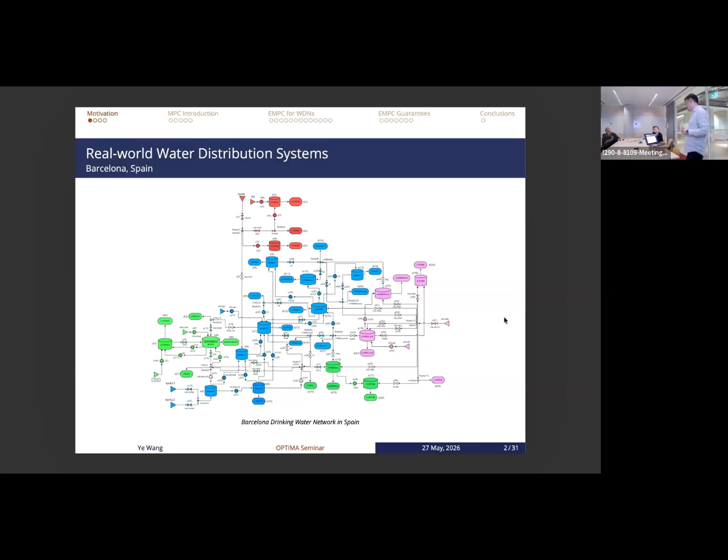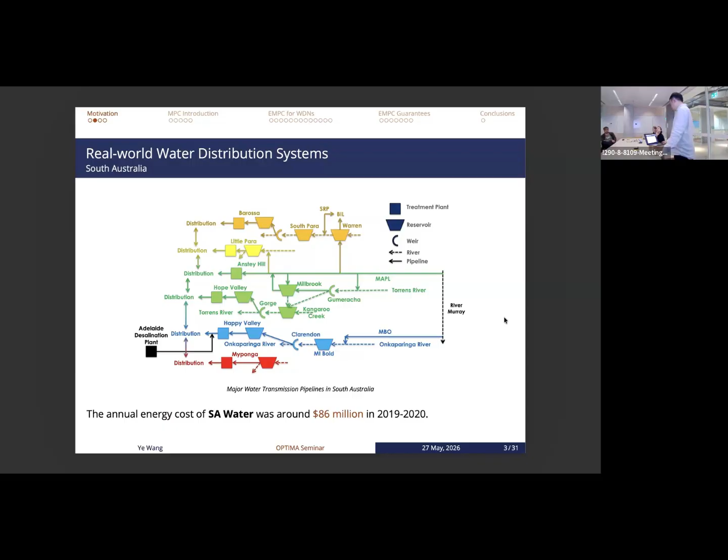For this kind of distribution system, I also want to show you the current operation in South Australia. A few years ago we had a chance to visit the headquarters of SA Water. There's a room called the operation room in the headquarters, with quite big screens and a lot of computers. From that room, they can remotely operate all the pump stations across the region.

And there are several teams actually working in shifts, just manually choosing operations, turning the pumps on and off remotely. And of course, since they consume a lot of energy, a lot of electricity, they can access the national electricity market. So they directly buy electricity from the market using the spot market price. So they also have some access to this price prediction.

So actually, when they choose operations, of course, there's some guideline. For example, they have some price threshold, predefined maybe by the other team, suggesting the operation team choose pumping when the price is below a certain level. And also, they want to make sure from this room they can operate the pump station and also monitor the water storage in some reservoir, in order to meet the water demands.

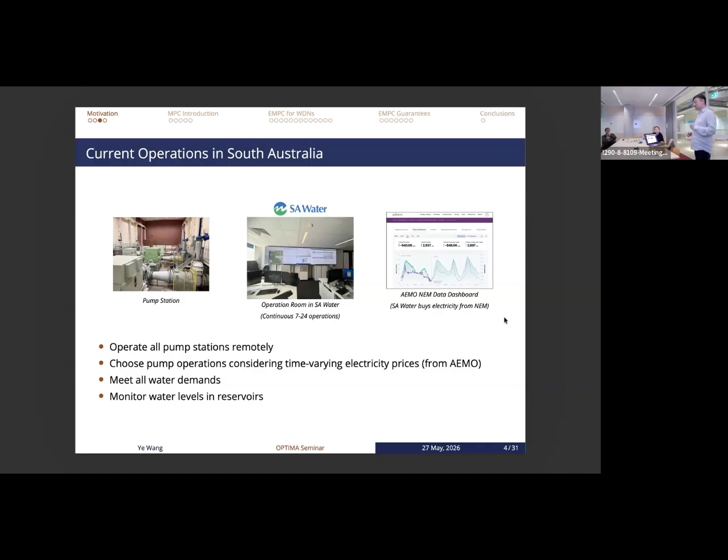Well, for us in academia, in the university, we also want to do research. We want to design optimization-based control for this type of system. So we need to consider the system: it has pressure pipes, pumps, and valves, and most importantly, there's storage in the system. And by considering these time-varying prices and time-varying demands, if we have some storage, by intuition we know that we can shift some operation from expensive to cheap periods.

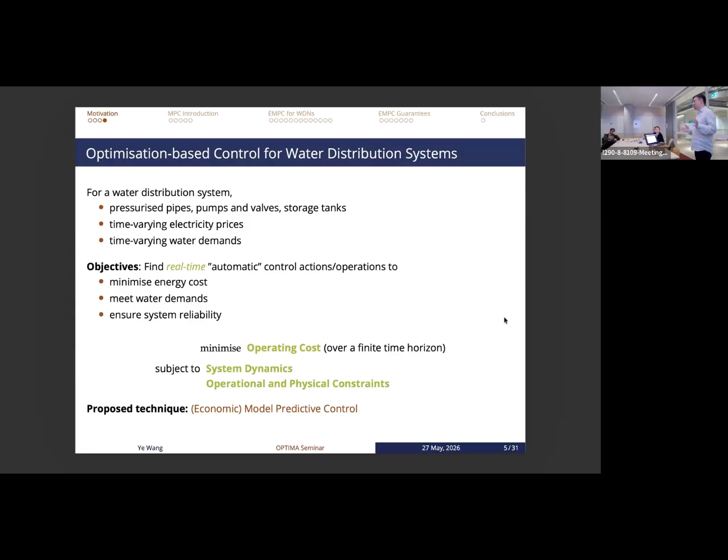And the goal is that we want to find some kind of real-time automatic control actions or operations to minimize the total energy cost, and at the same time, we need to meet all the water demands. And also when we deploy a control algorithm, we want to ensure the system is safe and reliable, so it can be used in the long term. So to achieve that, we can basically write an optimization problem. And we propose to use MPC, or economic model predictive control, which is quite an advanced control technique that can help us formulate a problem in order to make a good decision.

Well, before I enter the technical details on how to design this economic MPC, for a general audience, I just want to briefly introduce what MPC is. In terms of terminology, it's called model predictive control. Here, the model actually refers to the system model or system dynamic model. So rather than an optimization problem being called a model, here we call the model a dynamic model. So in MPC, we want to use a dynamic model of a system or plant to predict some future evolution of the system in order to choose a good control action or control operation.

And basically in MPC, we just want to build an optimizer or optimization problem. We'll design some objective function and also some constraints. And of course, the system model is included in the constraints. And sometimes we do have a reference, that is, we want to drive the system along some given trajectory, either a fixed point or time-varying references. And sometimes when we compute the objective function, we may consider some information. Since it's along the prediction horizon, we need to use some forecast information.

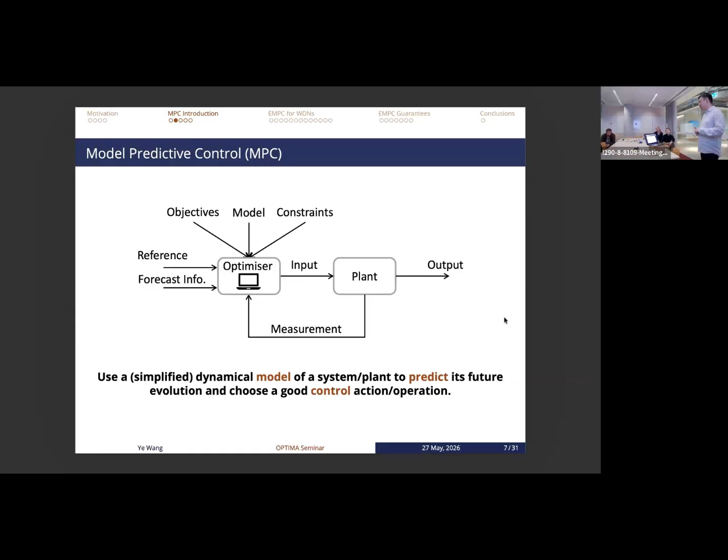So for MPC, the main task is to formulate an optimization problem. So here's one. We have a reference, which I just denote by R_t. It could be varying or it could be a constant. And there may be a corresponding reference for the input. We want to minimize the difference between the system output and the reference point. And we have a prediction model, a system dynamics model, where X is the state and U is the input. From the prediction model, we can also output some signal, denoted by Y.

And for the system input and system output, sometimes there may be some physical or operational constraints to be satisfied. And the last constraint is called state feedback. That is, at each time step we take the measurement of the real system and set it as the first predicted state in order to initialize this optimization problem. So as shown in this figure, the goal is that for a given reference R_t, we want to drive the system output to track this reference R_t.

And we'll make it by solving this optimization problem over a horizon. I just denote it by N, so it's an N-step optimization problem. We'll choose the corresponding N control inputs, from U0 to UN-1. And as you know, by solving this optimization problem, we optimize with respect to a sequence of control actions, from U0 to UN-1.

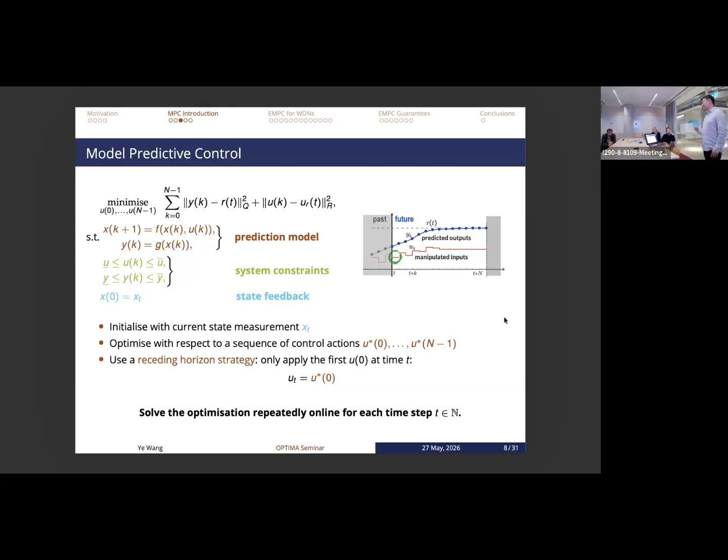And for the MPC, we always just implement the first one. So we consider a receding horizon strategy: only implement the first one and discard the rest. And we resolve this problem again at a different time step. So we just solve this optimization problem repeatedly online. At each time step we just use the first one and discard the rest.

And economic model predictive control is a concept that came after MPC appeared. It's also driven by the application. Economic model predictive control is like a more general form, or generalized MPC. In this case, there's no reference given. So instead of minimizing the difference between output and the reference, we want to directly minimize some stage cost function. It could be any general function.

For example, in the water system, we want to directly minimize the economic cost. And of course, sometimes we have this price signal, and we also need to use a price forecast along the horizon.

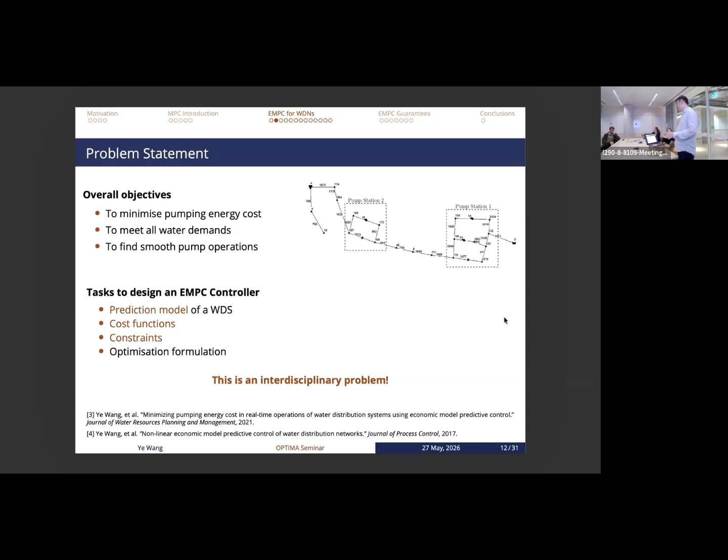Well, for the predictive model, we need to model each important element in the system. The first one is the tank, the storage.

So for each tank in the system, we can apply mass balance or volume balance to the tank, and we can find a differential equation. So here is a discrete version of the differential equation.

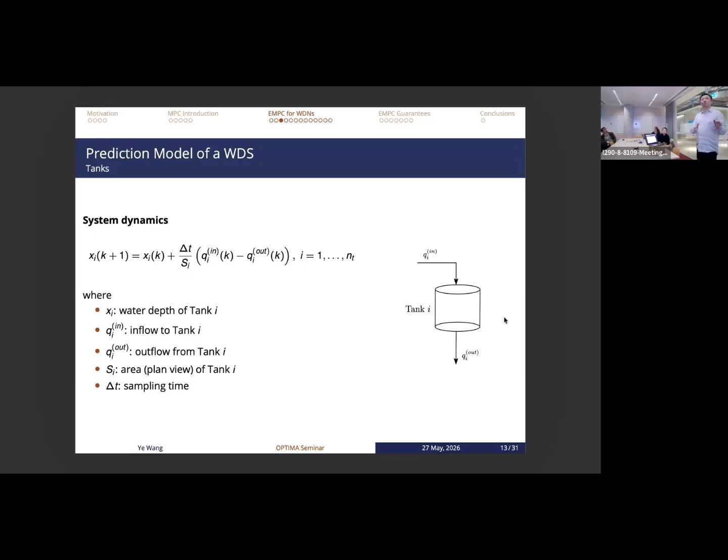X of I is the water depth of tank I, and K is the time. So the water depth of tank I at the next step is equal to the previous time step, plus the accumulated water to this tank and minus the water used after the tank. Q in is the inflow to the tank, Q out is the outflow from the tank, and then we just use the sampling time and also the area of the tank to transform this water flow to the volume or to the depth.

The second element is the pumps. So in a water system, they may have several pump stations, either set in series or at different branches. And also in each pump station, they may have several pumps set in parallel. So here, we just want to find a control-oriented model, or simplified model, for the control purpose.

So here we want to model the outflow from this pump station, and we use an integer variable to denote how many pumps are turned on in this pump station. It's denoted by this n, and through a function phi we want to build this relationship between this integer variable and the outflow through this pump station.

And another constraint we need to consider is for the nodes. So there are several junction nodes in the system without storage capacity. But for these nodes, we need to make sure the same volume balance or mass balance is satisfied. So for example, this node has two inflows and maybe two water demands. So the total inflow should be equal to the total outflow. And we can put a vector function to gather all the nodes, including all the nodes without storage capacity.

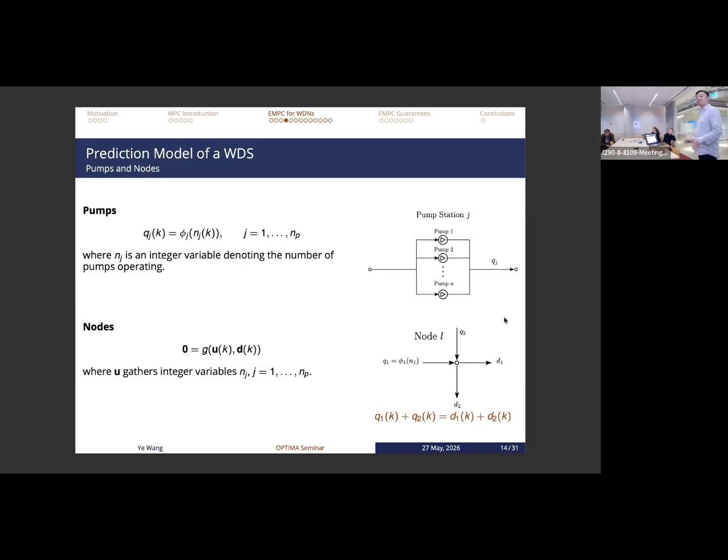And the next task is to define the cost function. From the objectives we are considering, the most important one would be the pump energy cost function. Since we choose the decision variable to be that integer variable n, we also want to fit another function to estimate the energy consumption by these n pumps which are turned on. And we could have time-varying electricity prices, forecasted along the EMPC horizon. If we do the summation over all pump stations, we have the total pump energy cost.

Another part is that we want smooth pump operation, which means we don't want to turn the pumps on and off too often. So we can define this smoothness cost function to penalize the change of the input. Here the input is those n, the integer variables. And R is just a weighting matrix, which we can tune in order to get this smooth cost function.

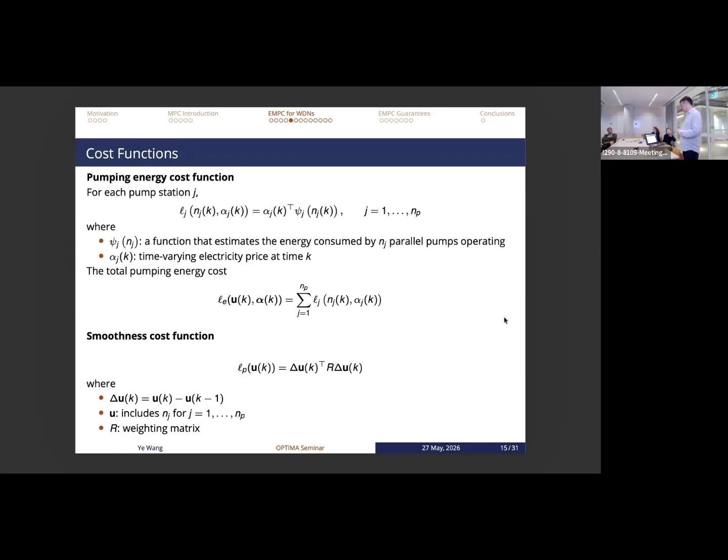So in the end, we can build this economic MPC optimization problem. We want to minimize the total cost over N steps. This optimization problem is subject to several constraints. The first two are from the prediction model. For the tank, there's a physical capacity, so there's an upper bound for each x. And from the operational point of view, we can also set a minimal water depth for each tank to get a lower bound for x.

And for the U, the lower bound is 0. The upper bound depends on how many parallel pumps we have in each pump station. Additionally, as highlighted in red, from EMPC we can also introduce a terminal cost and terminal constraint, which could be very useful when we discuss theoretical guarantees. I will discuss them later on.

Here we consider the price forecast and the demand forecast available along the EMPC prediction horizon. At each time t, we solve this optimization problem and only implement the first input, discarding the rest, and then in the next time step we resolve it with a new update of x t, from the new measurement of the system.

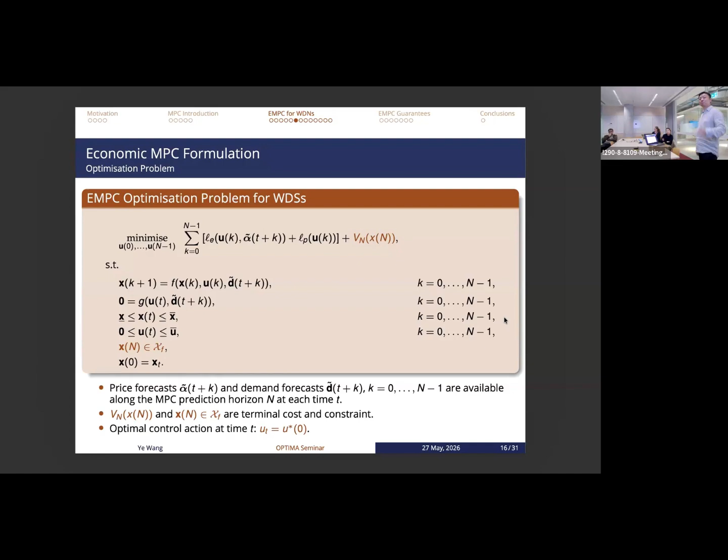Well, in order to test this economic EMPC, we just chose an open source benchmark. The original one is from the UK. It's called the Richmond Water Distribution Network. Here we also tuned it a little bit. We just want to start from something simple in order to verify and get some insight into these new algorithms.

So for this one, we only have one water source on the right-hand side, and there's a tank on the left-hand side, tank A. And there's one demand after tank A, at node 10. In this branch there are actually 2 pump stations. Pump station 1 has 2 parallel pumps. Pump station 2 has just 1 pump.

And using that system dynamic model, we can build this. We find this single dynamical function for tank A. And for the pumping flow, we want to find a model with respect to the integer variables. So here we have two integer variables. N1 is for pump station 1, so it could be 0, 1, or 2. N2 is just 0 or 1, for pump station 2.

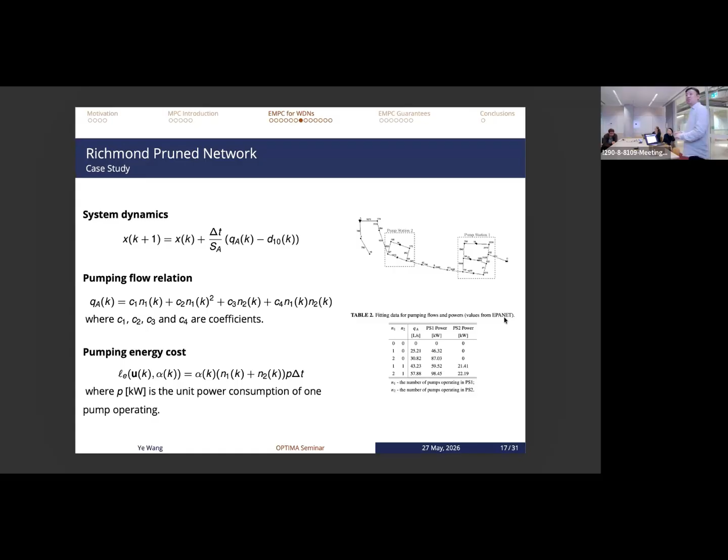And we can get the flow data corresponding to the N1 and N2 values, and also the corresponding power consumption for these two pump stations. With those data, we can fit the pumping flow relation and also find the pumping energy cost, which here is a linear function.

In terms of the constraints, for tank A, the physical limitation is a maximum height of 3.37. For the lower one, from the guidance for normal operation of the water system, we expect to have about 40% full storage in this tank. So we can set a lower bound of 1.4 meters for tank A.

And for the pumps, which are the input signal, U has two variables, N1 and N2. In pump station 1, we have two pumps. In pump station 2, we just have one pump. So that's from 0 to 2 or from 0 to 1.

Also, when we sampled the data from the simulator, we realized that when the first pump station opens two pumps but the second pump station doesn't open any pump, we cannot deliver very significant pumping flow, but the energy consumption will be quite high. So we want to exclude this scenario. Then we just put an additional constraint: N1 has to be greater than N2, N1 minus N2 less than 1, in order to eliminate the N1 equal to 2 and N2 equal to 0 case.

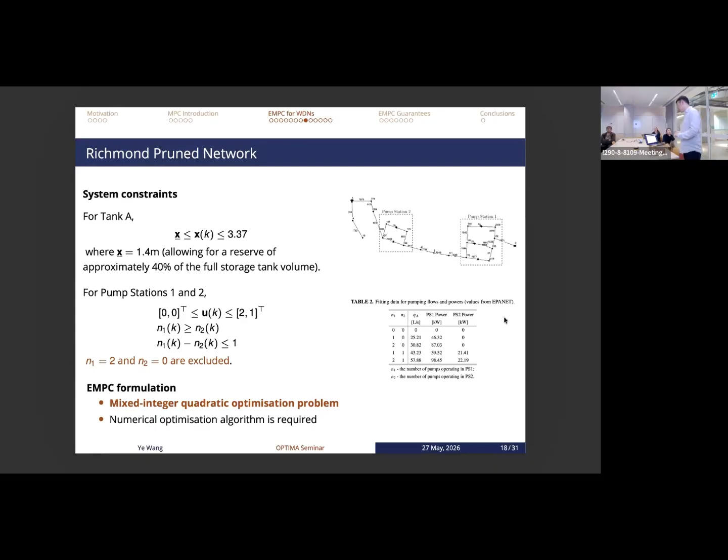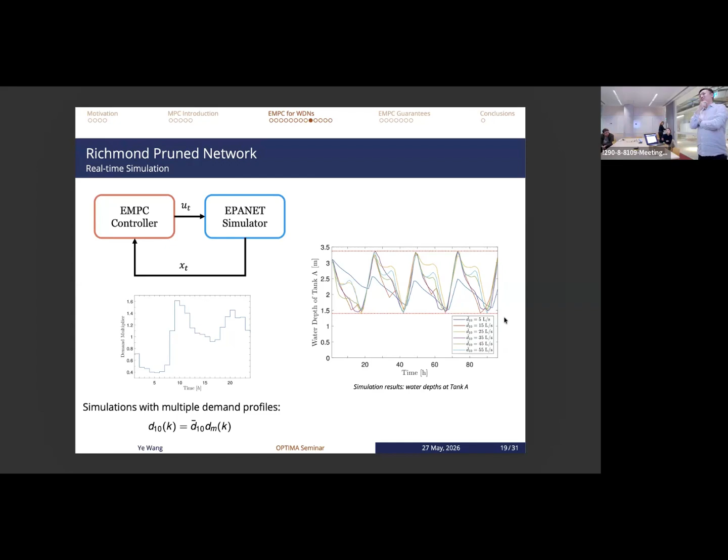So with different demand profiles, we can find on the right-hand side the tank evolution over, let's say, a 4-day simulation. It starts from the same water depth in the tank and then varies differently. That's because the demand will be different.

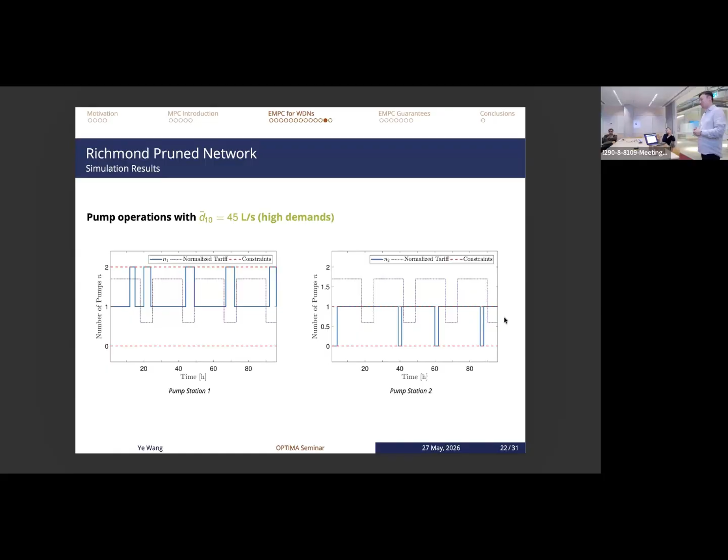We also do a comparison in order to verify the effectiveness of this EMPC. We compare with a simple controller called a trigger level controller. It's based on the amount of water stored in tank A to turn on the pumps. If we have a lot of water in tank A, we can turn off the pump. If the water level in tank A is below a certain amount, we can choose to open 1 pump, 2 pumps, or 3 pumps.

We do the comparison across different base demands from 5 to 55. For this network there's a capacity: for base demand greater than 55, it cannot be satisfied. So that is the capacity of the network. From the comparison here, we show the different costs.

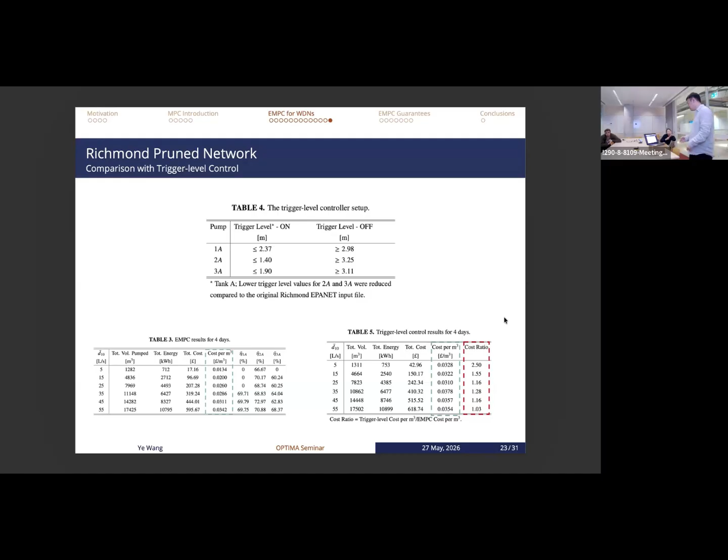Next, I just want to give you a brief discussion on the guarantees of economic MPC. The first property economic MPC can provide us is called recursive feasibility. With economic MPC, as you can see, we solve an optimization problem online at each time step. So we need to make sure that at least the problem is feasible. That's what we call recursive feasibility. If we start an economic MPC controller from the beginning, we want to make sure that at any time step in the future it will be feasible.

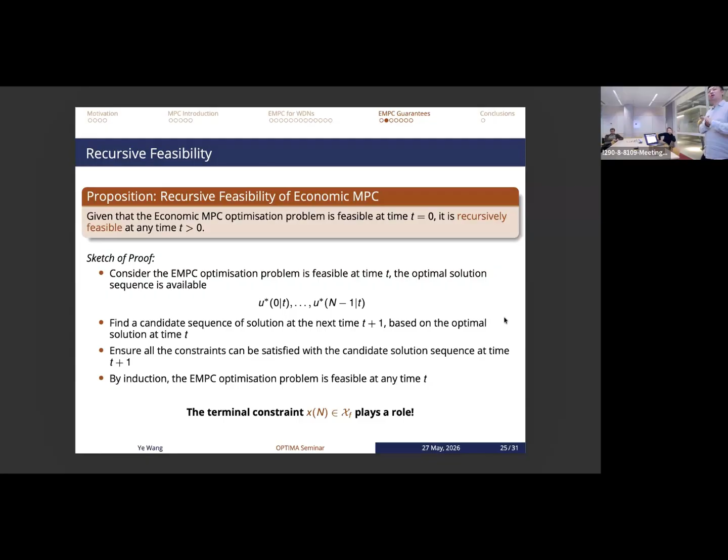And we do have a mathematical proof on this one. For the time being, I won't go into too much detail, but briefly, the terminal constraint actually plays a big role here when we do this mathematical proof for the recursive feasibility.

And for recursive feasibility, we also have the robust case, that is, when the model is not perfect. Here I use W to denote disturbance or uncertainty to the system. This uncertainty could affect the system dynamics. For example, in the water system, the uncertainty could come from the water demand. We may not have a perfect water demand forecast, and if the demand is not perfect, then the estimation of the water volumes or water depths in the tank would not be accurate.

The uncertainty may still be unknown, but one option to handle this uncertainty is to consider that it can be bounded by some known set, here big W. Now we can further improve our MPC using an approach called the constraint tightening approach. That is, we tighten our constraints on the state and on the input a little bit in order to make the controller robust. With that, we also have the recursive feasibility guarantee for the robust version of this economic MPC.

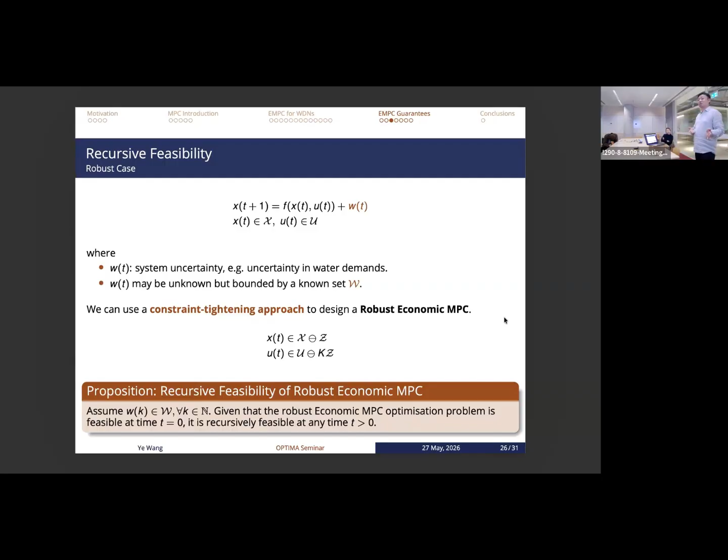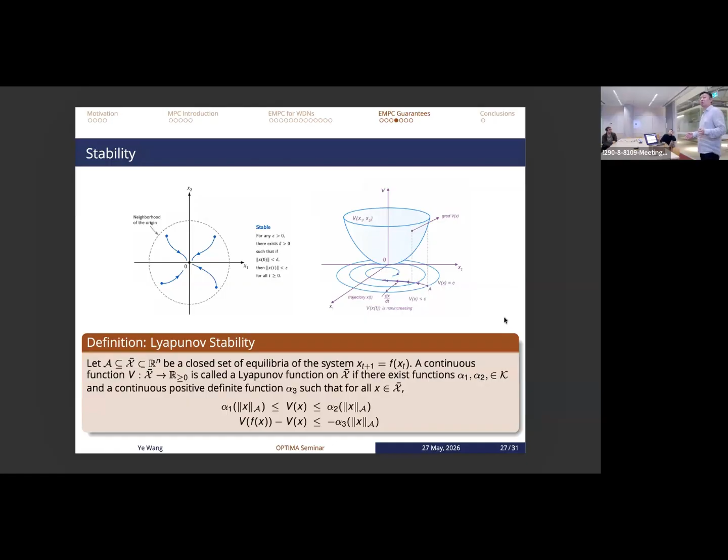Another important property: in control engineering, we care a lot about system stability. That is, with system dynamics, we are interested in whether the states of the system can be bounded, and sometimes whether they converge to some equilibrium point. We call it asymptotic stability. The technique we use is based on Lyapunov stability theory. Basically, we choose a Lyapunov function for a given system dynamics, and if the Lyapunov function satisfies these two conditions, then the system is stable or converges to some equilibrium point.

For MPC, Lyapunov theory has been applied to the standard MPC, and the key task is how to choose a Lyapunov function for the MPC controller. With reference tracking MPC, which is the classical MPC, the task is quite easy. We just directly use the MPC total cost as a Lyapunov function. The cost decreases over time because we minimize the error between the output and the given reference. So the cost converges, and it is suitable as a Lyapunov function.

But for economic MPC, that's not the case, because we have general economic cost functions, which means we cannot use the MPC cost as a Lyapunov function. So it was quite a challenging problem maybe 15 years ago, especially in academia. Some people from MPC still needed to learn more about Lyapunov theory, and there were some people from nonlinear control systems with a Lyapunov stability background.

So they may not know MPC. So then there's a professor, David Angeli, from the UK, from Imperial College London, who's an expert from this nonlinear control background, so knows a lot about the Lyapunov function, and then entered these areas. So he developed some theoretical proofs on these stability results for economic MPC.

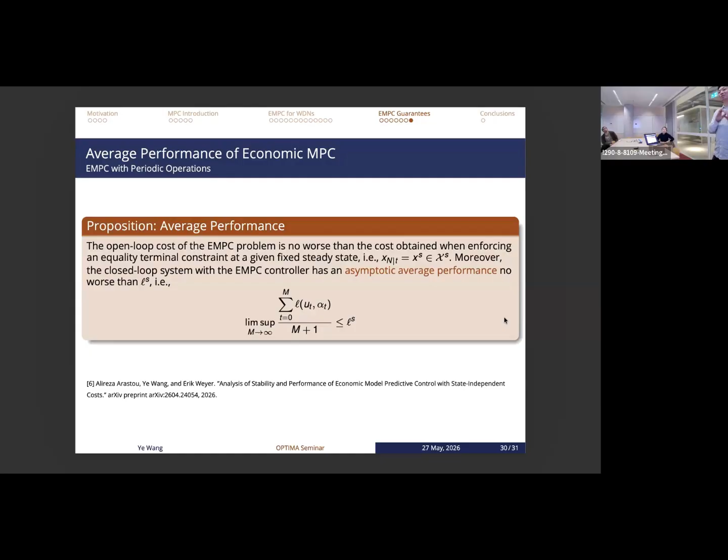In the end, I just want to quickly summarize the work. Economic MPC can find good operations and achieve very good performance for the water system. MPC can have very rigorous theoretical guarantees, and those guarantees can provide guidance when we design MPC for real world applications. Some ongoing works: sometimes the uncertainty is stochastic and may be unbounded. How to address these stochastic uncertainties is still quite challenging.

Another direction is that nowadays there is a lot of data available from real world systems. So how to use those data to either improve the model of the system or save us some computation, because we still need to solve the optimization problem online. That leads to another research line called learning-based control or data-driven control.